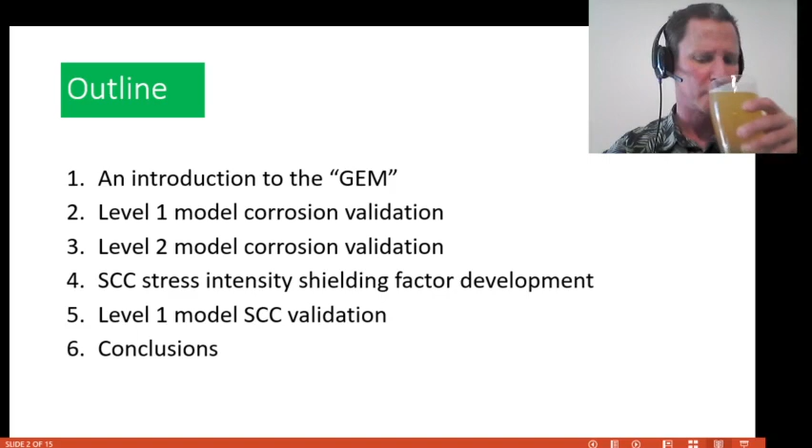I have a former professor who said you really don't need an outline in a presentation, just start at the start and end at the end, so I'm just going to keep moving here.

Here's my gamma exponent model, and those of you in the cracking business will notice it's very similar to the original log secant model used for surface crack analysis. If we look back 50 years ago, somebody came up with a log secant model for through-wall cracks, and that's a really good model. Then they took that model and the B31G equation and kind of Frankensteined it together, thinking, well, now we have a log secant model for surface cracks, isn't that wonderful? But mathematically, not so much.

So what I decided to do is redo the log secant model derivation, but rather than starting with a through-wall crack, going through all the math, and then empirically correcting for depth, I decided to do it the other way around. Assume we're starting with a part-through-wall crack, assume it's infinitely long, go through all the log secant model math, and then at the end empirically correct the length. That way you're mathematically focused on depth rather than length. Length kind of doesn't matter.

What's really interesting is that when I do the log secant model derivation for a part-through-wall crack, I have to put in a backwall correction factor, which in this case is the square root of the secant of the flaw depth. What's really cool is that if I put in that secant term and go through all the mathematics, at the very end I pop out with this remaining ligament to the gamma exponent term, which replaces the need to Frankenstein in a B31G equation.

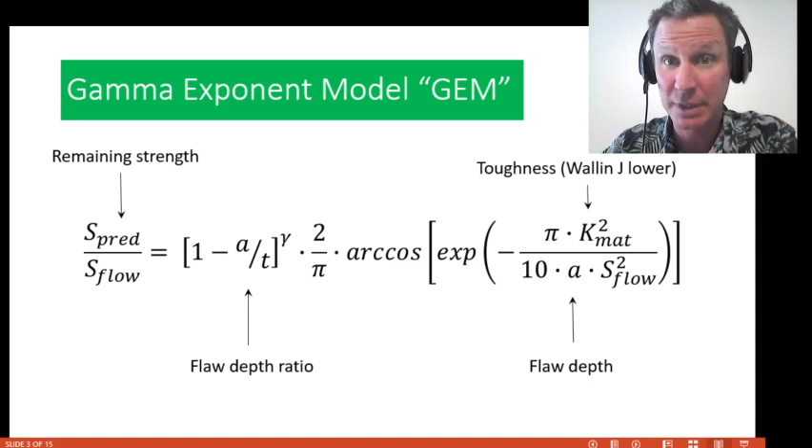So looking at the equation, I've got a remaining strength, the predicted failure strength over the flow strength. I've got a remaining ligament term to the gamma exponent, 2 over pi, and then an arc cos exponential term, which looks quite similar to the log secant model, except that it's based on depth, not on length.

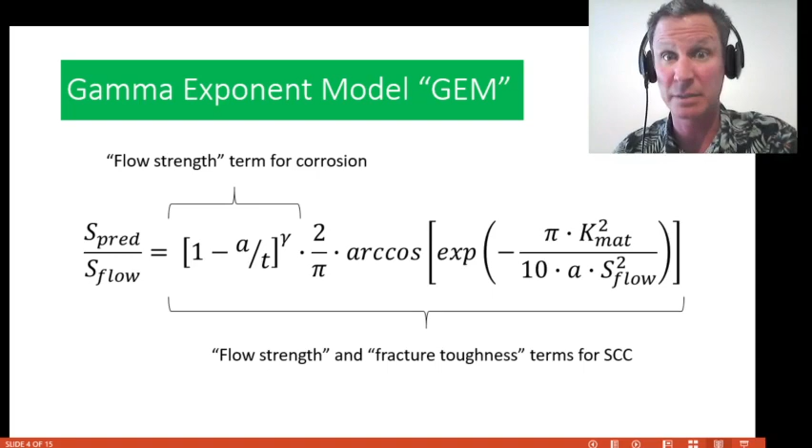Now, very similar to the log secant model for surface cracks, I have a flow strength kind of term, and then I use that for corrosion. I also have a flow strength and fracture toughness term, which I use for stress corrosion cracking. So it's kind of analogous to that log secant model for surface cracks, but there are some key differences. It's based on depth, not length, so that's key.

Now, the small print here is if I'm doing a corrosion assessment, I'm not going to use the whole equation. I just use that flow strength equation. What I'll do for corrosion is assume I've got a semi-elliptical flaw profile, and I'll multiply the flaw depth ratio by a pi over 4 factor. That's a pretty common thing that we do in the fracture mechanics business.

If I do have a full profile, I use my effective length method, which I'm going to show you a little bit later on.

And then here you'll see that I've got the gamma exponent defined as the length of the flaw divided by the radius of the pipe, up to a maximum of 1/2. That's kind of important, and it's going to have some of you scratching your heads. The first thing is it basically means that we're not looking at any length of corrosion that's more than 1/4 of the diameter. If your flaw is 1/4 of a diameter or the length of a football field, mathematically, it really doesn't affect your failure strength prediction.

I know that's going to surprise you, but it kind of works out that way. And the second thing, which is going to have various people stopping the video right now and sending letters to the editor, is that maximum gamma exponent of 1/2 means that if I have a long flaw, my failure strength is proportional to the square root of the remaining ligament. That's actually going to explode a few people's heads. The failure strength is not proportional to the remaining ligament, it's proportional to the square root of the remaining ligament. And before you get too upset about that, there actually is a technical rationale. That number is theoretically derived when I go through the formal derivation. You can find that in ASME Journal of Pressure Vessel Technology. So try and hold off on the letters for a little bit.

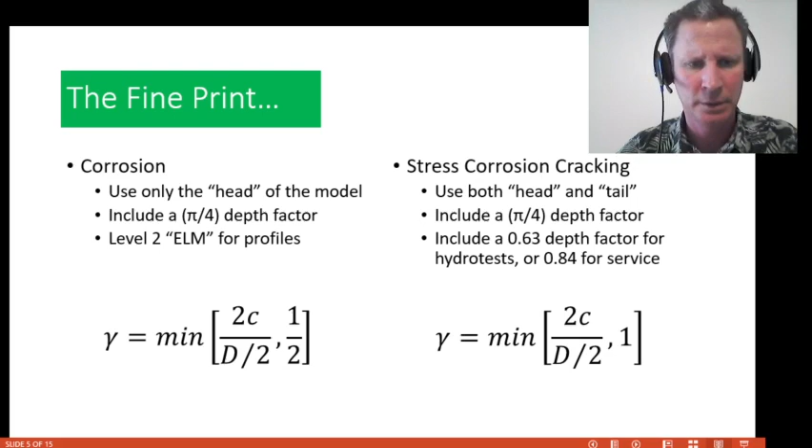So let's take a look at how this all plays out. I do have some industry failure data. Cronin data and Battelle data is all corrosion stuff. The Rothwell data and the Davies data is stress corrosion cracking stuff. I find it very difficult to find stress corrosion cracking data.

The papers will mention them sometimes, but the data is not necessarily publicly available. I think there are some people who are worried that somebody like me might get their hands on some data and actually develop a new flaw assessment methodology that might save them, I don't know, tens or hundreds of millions of dollars, and we wouldn't want that, would we?

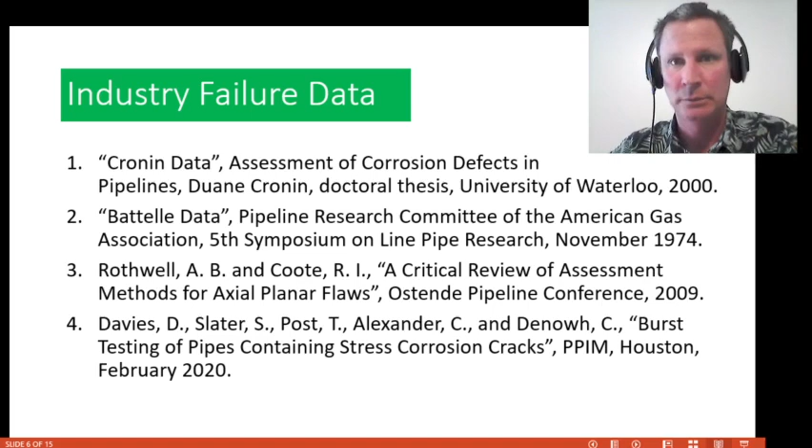Okay, so here's my corrosion data. It's not actually a Jackson Pollock painting, which it kind of looks like from a distance. On the y-axis, we have the predicted failure strength using either the gamma exponent model, which I just mentioned, or using modified B31G. On the x-axis, we have the true failure strength, which is measured in a laboratory hydro test. And you'll see here that, quite frankly, neither model is particularly good. We've got 2 overlapping shotgun blasts. You'll see just from this level 1 analysis that the GEM model is slightly more accurate than the modified B31G, but nobody's really having any parties over this validation, quite frankly.

They're both kind of messy.

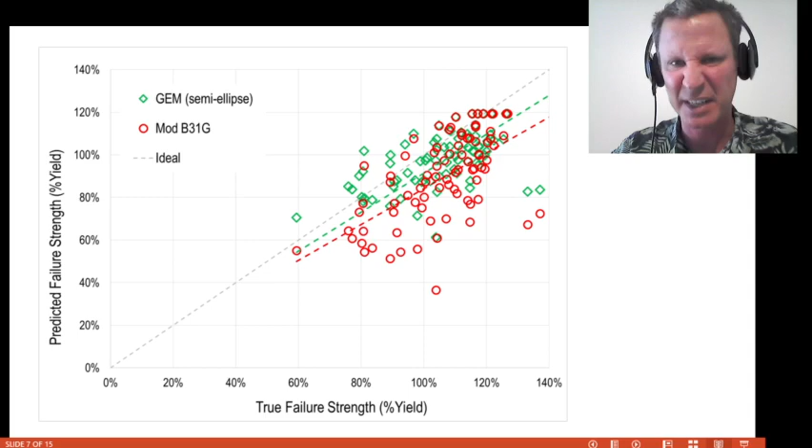Now, one thing I'll point to is that there are some non-conservative predictions here, and this is a level 1 assessment. Those are the ones over the unity line. We've got most of our data points below the unity line, which means they are conservative, which is safe for our pipeline.

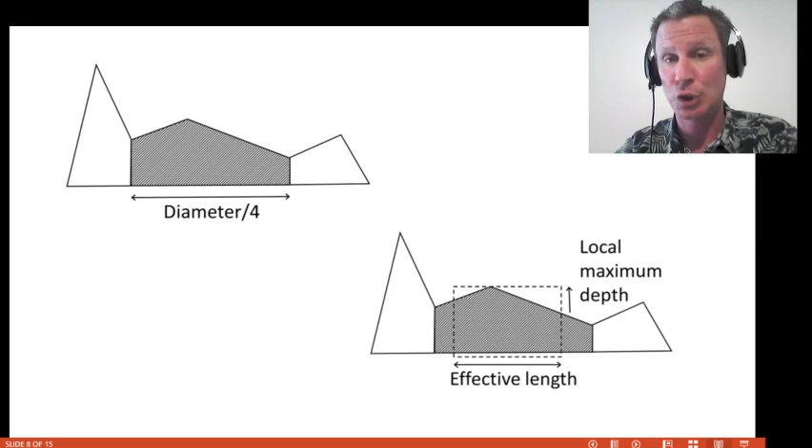Now, some of you will be familiar with the RSTRENG model. With the RSTRENG model, what you do is look at every length and depth combination from one end of the flaw to the other. For each one of those combinations, you calculate the area of the corrosion flaw, divide that area by the length, and come up with an average depth. Then you take that length and average depth and put it in the basic B31G. You do that for every combination and permutation from here until the end of time, and then choose the lower bound.

And of course, that includes a Folias factor, which I kind of sort of don't agree with, as I mentioned before. Now, what I do with the GEM, my effective length method, is I flip things around a little bit. I don't look at every length combination. I only look at 1/4 diameter, because that's the mathematical limit of where my gamma exponent is going to be.

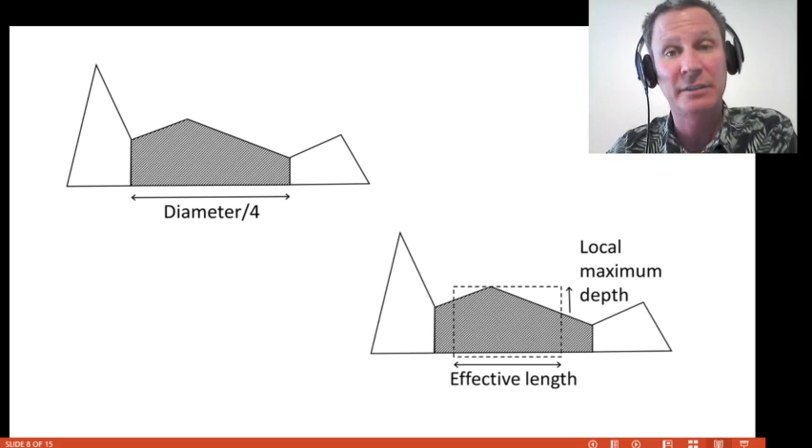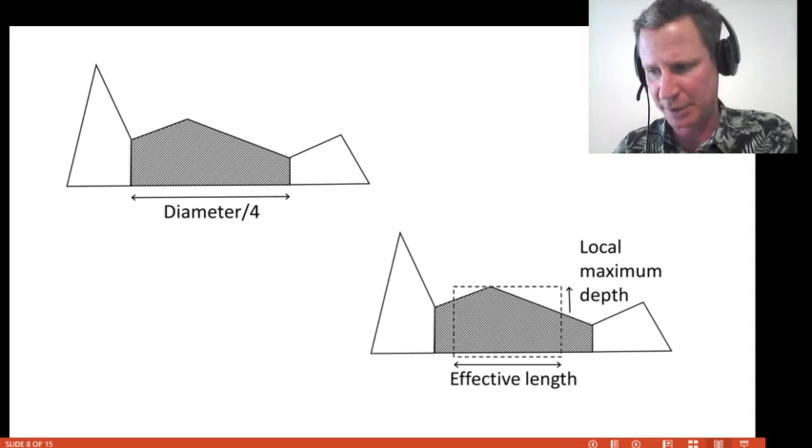Rather than dividing by the full length and getting an average depth, I take the area under the curve and divide it by the local maximum depth to get an effective length. Then I look at every 1/4 diameter length from one end of the flaw to the other, do the calculation, and choose the lower bound. Couple key differences there. And then, of course, I've got the square root in there that is going to drive some of you completely crazy. Let's see how that plays out.

One thing I want to mention is that we saw before with the level 1 analysis, there were some non-conservative predictions. When we go to a level 2 assessment, now everything is conservative, which is kind of sort of backwards from our typical assessments, right? Usually, when doing an assessment, you assume that level 1, your lazy assessment, is going to be conservative, and if that works, you're fine. But if that doesn't work, you'd go to a level 2 assessment, which is more detailed, which kind of sort of should be less conservative, right?

But in this case, for both models, GEM and B31G, there is a certain series of level 1 predictions that are non-conservative. And when you go to level 2, you become more conservative, which is kind of sort of backwards. That's something to think about.

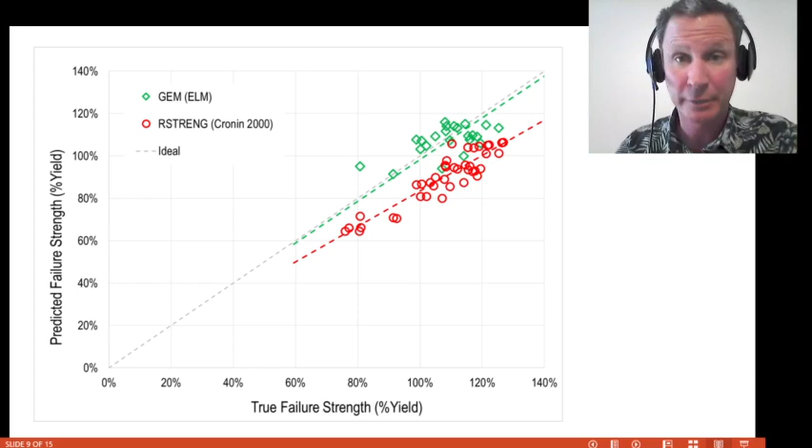If you dig into the mathematics, you'll find that those non-conservative mod B31G predictions tend to be the shorter flaws, and the overly conservative predictions tend to be the longer flaws. That's actually kind of interesting because it brings up a catch-22 situation for pipeline operators. If they find a long flaw, they run through the math, find a really low predicted failure pressure, and run out to dig that flaw. But based on the conservatism in this model, those longer flaws actually have a higher degree of conservatism, meaning you probably don't need to dig them. Kind of a catch-22 situation, but...

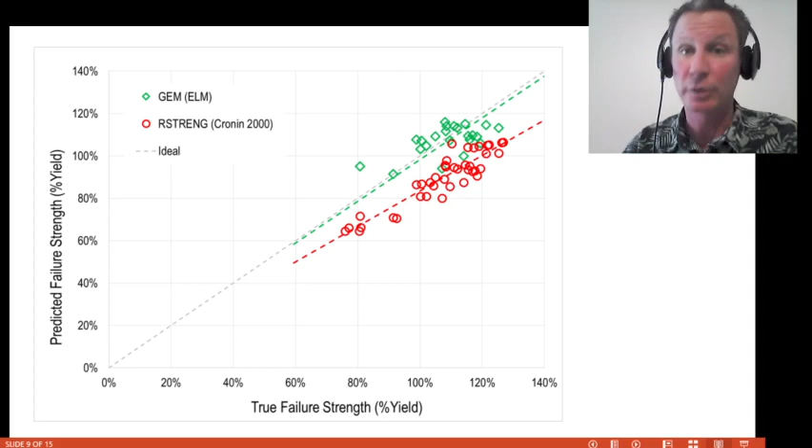I should also remind everybody that with this GEM, all these diamonds magically lining up along the diagonal—remember, it's a square root relationship. So think about that for your letter to the editor.

Okay, I think we're done with corrosion for now. We're going to jump into stress corrosion cracking for a couple of minutes.

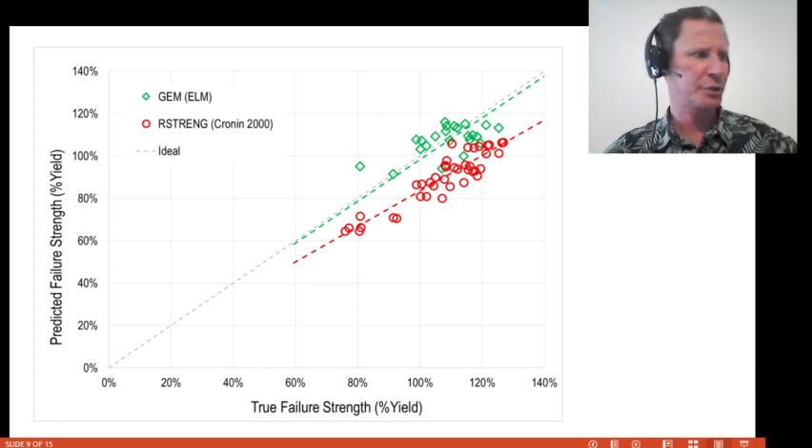If you find your crack analysis handbook from Tada, Paris, and Irwin, you'll find there's a stress intensity factor solution for what they call periodic crack arrays. That basically means you've got lots of cracks lined up parallel to each other, just like you'd find in a stress corrosion cracking colony.

The effect of this is, as I mentioned before, you get this crack shielding effect, where if the cracks are close enough together, they start to influence each other's stress intensity and share it, decreasing the overall, which is good. As contradictory as it sounds, that's actually safer for the pipe.

If you look at the stress intensity factor solutions, you'll find that these crack arrays become thermodynamically metastable when the crack's depth to spacing ratio is 1/3, which sounds a little weird. That means that as your cracks grow, they'll get to a point where they influence each other enough that they cancel out each other's stress intensity factors, and they actually go dormant.

So the dormancy that we sometimes talk about in stress corrosion cracking can potentially be explained using thermodynamics, as opposed to various electrochemistry answers that some people have come up with.

There's a very interesting paper out there by a fellow named Anthony Parker. He was doing research work at one of the military colleges in England. What he demonstrated, which is fascinating, is that cracks will grow until they have spacing of 1/3, and then they'll go dormant. But he recognized a phenomenon he called shedding, where 2/3 of those cracks will go dormant, but 1/3 of the cracks, equally spaced, will remain live and continue to grow with a new spacing ratio until they also reach 1/3.

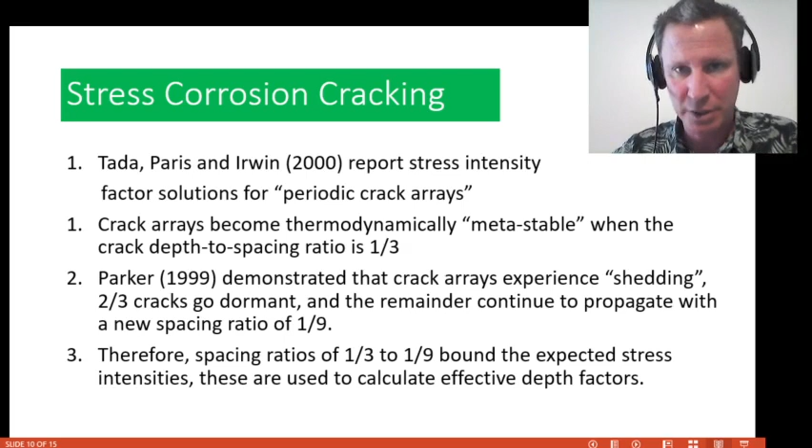When I mention this 1/3, 1/9 crack depth spacing ratio, it doesn't make a whole lot of sense until you dig up your old American Gas Association Pipeline Research Council study from 1974, and you find this quite beautiful metallographic cross-section.

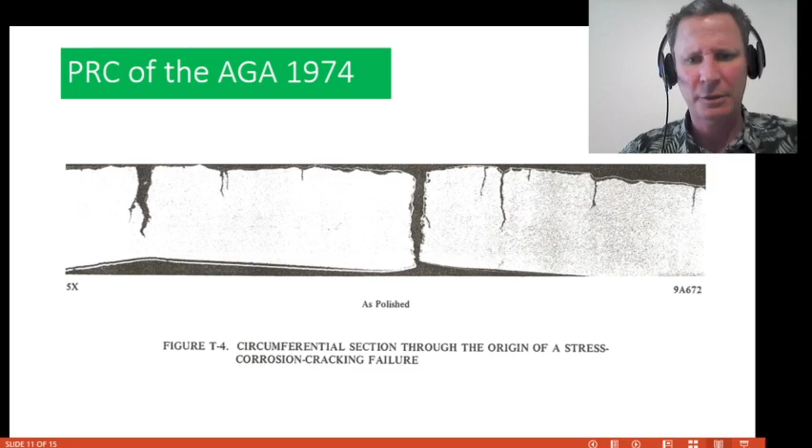I strongly recommend reading his paper. It's not an easy read, but once you wrap your head around it, it's pretty amazing, and it kind of seems to work. This isn't perfect, but when you consider this is a natural phenomenon, and we see this 1-in-3 spacing, it blows my mind.

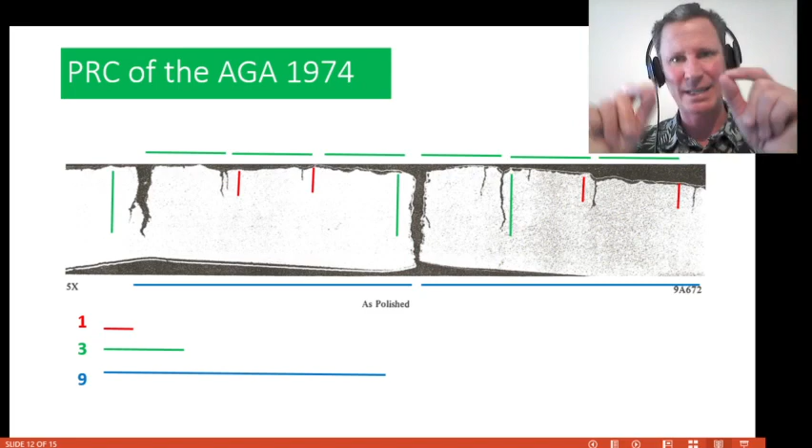So what I did with the Tada Paris-Irwin stress intensity factors and compliance factors is I back-calculated an effective depth to use in the GEM model. And because we've got a crack and shed sequence alternating between a 3rd and a 9th, I used 2 different depth factors, and then I averaged them.

Now, when I take my data and plot it, I find a couple interesting things here. I only have 1 service failure, and if I use the average, that turns out to be non-conservative.

But if I were to use the conservative value, it would be quite close to the correct true value. And what that makes me think is, if you have some cracks in a crack and shed sequence, and you have a service failure, it's very likely that crack happened to be in the worst case scenario of its crack and shed sequence. So my suggestion at this point is to use the more conservative values for service failures.

But for a hydro test, at any given time, you don't know where those cracks are in the crack and shed sequence, right? So I've come up with a range, and the average and the range kind of seem to work. Now, I've only got 9 data points, but I think this is working out pretty good. I'm pretty happy with it so far.

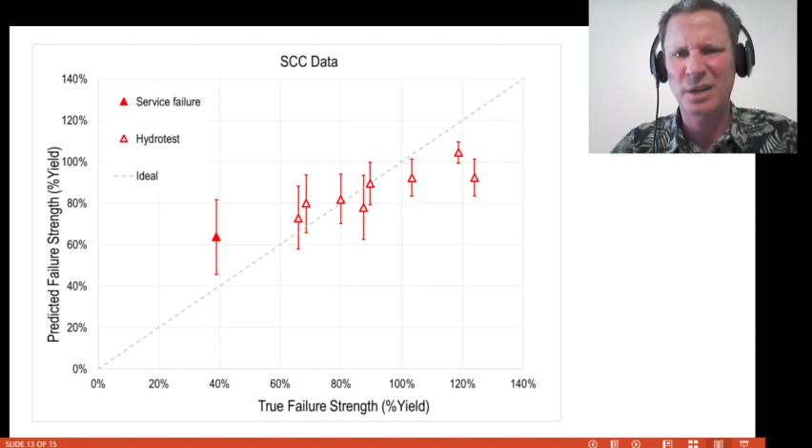Now, I guess I'm probably getting to the end of my time slot. So I'll just say that I've shown you a few validation efforts. I've looked at level 1 and level 2 corrosion assessments, and I've got a level 1 SCC assessment. And if you compare those to the industry numbers, you'll find that it's really pretty good.

Now, one thing I would like to point out and give you something to think about is there's a study put out about this time last year by PRCI. They were looking at R-streng and the p-squared model. And what they did is they reported the R-streng model has an average error of 30% plus or minus 10%.

So what that means is the average error is 3 full standard deviations away from reality. Now, if this was a manufacturing process, we would say that we had lost process control, right? 3 full standard deviations. If you think about your bell curve and the little tail on the bell curve, 3 full standard deviations corresponds to something like 0.2%.

Now, there was a big improvement going from R-streng to P-squared, but they still have an average error of 13% with a plus or minus of 7%. So that's almost 2 full standard deviations, and that little tail on your distribution is about 3%.

Now, the proponents of this model, B31G in general, of which I am obviously not one of them, will tell you that those statistics demonstrate that R-streng is conservative and P-squared is conservative, and they can say that with a certain degree of statistical confidence. But I will let you know that the statistical confidence on the conservatism is actually a double-edged sword. Because if you look at the flip side, that means you have an equal lack of statistical confidence in the model being mathematically correct. The more sure you are that you're conservative means the more sure that your mathematics is not accurate and it's wrong.

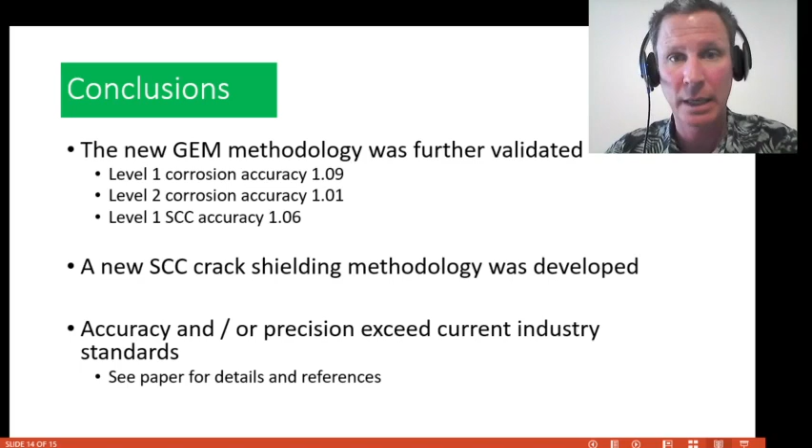And as the PRCI statistics show, it statistically, mathematically proves itself, disproves itself, proves that it doesn't work. And I think that we all need to have a good hard think about that because that is costing certain people tens or hundreds of millions of dollars. And the fact that we have bad math buried in everything we're doing, quite frankly, scares the heck out of me. I really think that everybody should take a serious look at this.